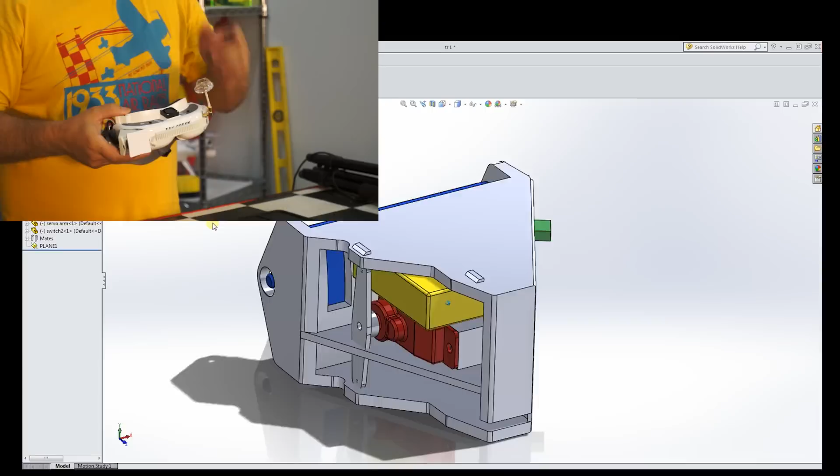And by ultimate, what I mean is head tracking patch antenna goodness. Stay tuned as we walk through this DIY project you can do at home.

First thing you're going to be saying is, why do I need a head tracking patch antenna for your goggles? If you're familiar with the Laforge system, it's a diversity system for the Fat Shark goggles. You want diversity so you can run a patch antenna, circular polarized antenna, two patch antennas, different types of antennas for different types of flying.

But the problem is patch antennas are very directional, meaning they've got to stay somewhat level, pitched up slightly, in the general direction of where your aircraft is flying. If you're an FPV pilot like myself, when you fly, your head is moving around.

Before the Laforge, our diversity systems were these big heavy tripods that you had to lug around. But they were stationary, so you're able to angle your patch antennas in the general area you're flying. So they were great for a stable video signal, but terrible for portability.

So the Laforge system was a great product when it came out, but the problem is, like I said, when your head is pointing at the ground, you're not really utilizing that secondary patch antenna to its full advantage. So I thought, what can we do to improve this?

And the Millennium Falcon upgrade to the Star Trek Laforge was born. And obviously you can see why I'm calling it the Millennium Falcon. But it's just a module, and we're utilizing the head tracking bay. It just snaps in, and allows that patch antenna, at any angle, to stay level as you move your head around in FPV flight, to take full advantage of your Laforge diversity system. So stay tuned, we're going to walk through the build right now.

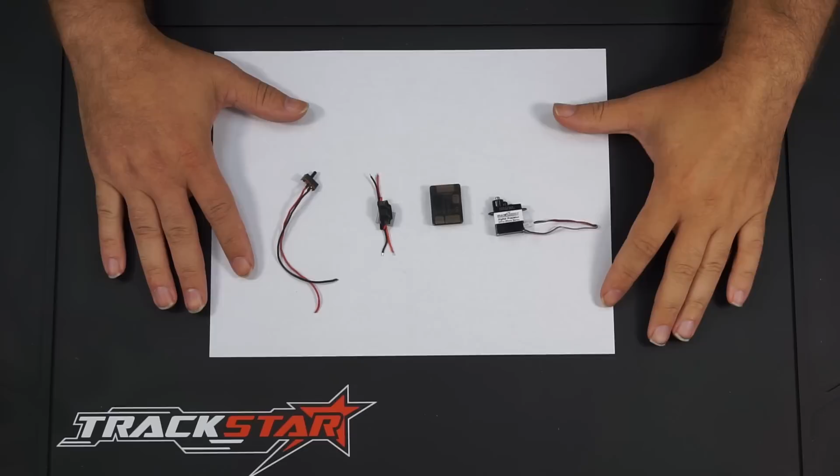Alright guys, let's go over what we're going to need to get this build going. First thing is just a small micro switch, 2 position, smaller the better. Needs to be able to handle at least 1 amp. Most of them in this class will easily handle that. I actually scavenged this from a toy, pulled it out, cut the wires, but you can pick these up at Radio Shack or any electronic hardware store, or just scavenge one yourself.

You're going to need a 5-volt BEC, smaller the better, at least a half amp, because we are going to be running a servo off of that and our FC as well. This particular one is shrink wrapped and already has wires soldered right up to it, so it's fairly nice, very small, easy to use BEC. It's actually the smallest one that I know of. You could also do something like a Pololu, but you just shrink wrap it, solder the wires onto it. I don't know how to pronounce that name, but those BECs work extremely well as well.

You're going to need a micro FC, 32-bit, compatible with CleanFlight. Smaller the better. This particular one is the 10 DOF. It comes with a nice mounting case, so I actually did my CAD work around this particular FC. You can pick this one up from Hobby King, and it works extremely well. It's about the smallest one that I know of as well, with the BEC.

Also, you're going to want a high quality 5-gram servo. Any 5-gram servo will work on this. This particular one is made by Blue Arrow. It's a digital, full metal gear, high torque, 5-gram servo. I like this because the higher quality digital servos have less ratcheting as they're moving. Since this is going to be on your head, you don't want audible sounds of that servo moving or that ratcheting coming through. This servo is extremely quiet, extremely smooth, extremely high resolution, and like I mentioned, ball bearing and full metal gear. So I recommend one of these servos, or just any other quality 5-gram servo you can pick up.

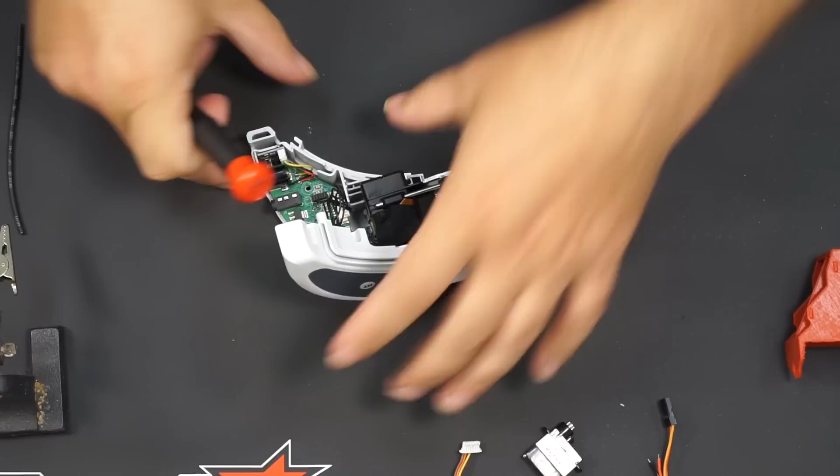So let's go ahead and get started. Okay, with the screws out, just carefully lift off the top of your goggles and flex that to the side. Just be careful, there's a couple ribbon cables. We don't need to fully disassemble these goggles. All we're really going to do is take out this board just to make it a little easier to solder. There's just one screw right over here that holds that in.

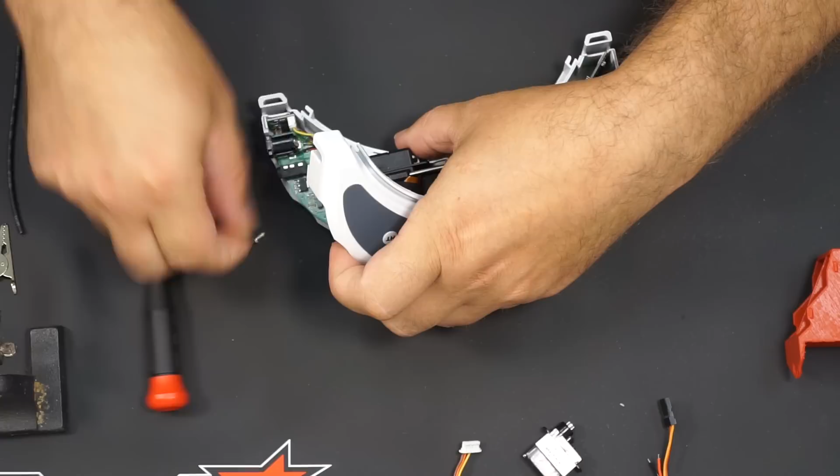And we're able to lift that up. We've got a connector right over here. Just pop that off. And one right up here. Go ahead and set the rest of the goggles to the side.

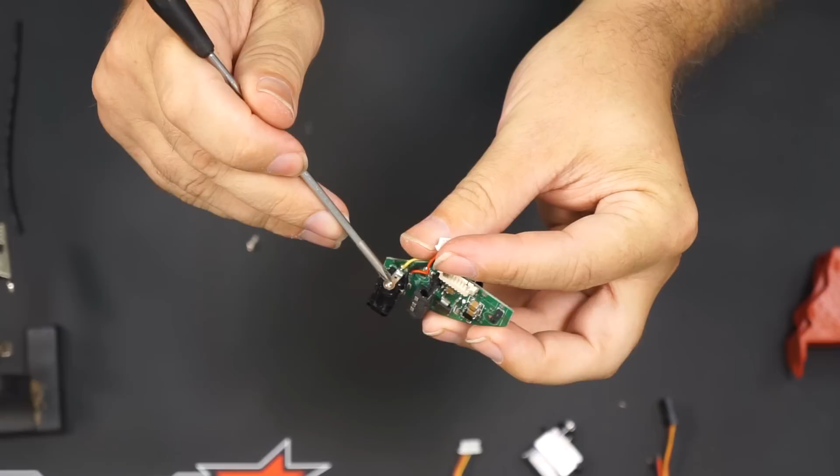Let's take a look at this. Right here is our 5.5 barrel 12 volt in. The center pin right here is our positive, and that is our negative. I'm going to go ahead and just take the servo extension, clip it off, and get it soldered right on there.

Okay, now that we have our goggles back together, we just need to check functionality as well as our voltage from our tap port that we just put on in there. You can see lots of room. We can just tuck that away inside the goggles. It's not going to interfere with anything, even if you want to put the original Trinity head tracker back on inside.

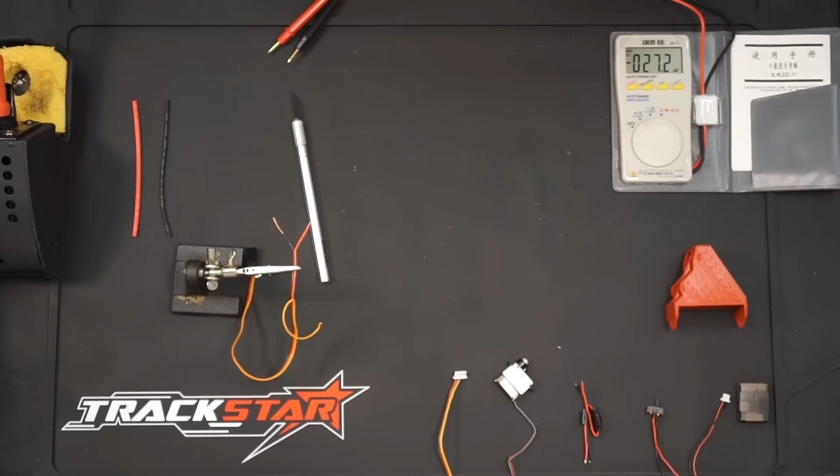So first thing I'm going to do is just go ahead and plug in my battery. And yep, I still have video. AV2 is showing on the OSD, so everything is functioning as far as that's concerned. Let's go ahead and check voltage out. I'm just going to go ahead and plug this in and check for our 8 volts coming from this.

Here we go, 8.28, so no problems there. So we are ready to move on forward to the rest of the electronics which are going to be on this. Okay, so now we need to make sense of the rest of this wiring.

Essentially, we've got power coming in from the mod we just did to the goggles via our servo extension that we clipped off. So this is the female end of that. So we'll go ahead and use that as power into our BEC. From the BEC, I'm going to put in another small connector so that I can isolate and remove the BEC if I ever needed to, as well as this is going to be tucked into the goggles itself, and I wanted to be able to have a separation point without the BEC.

So we've got this connector, which is the male side of that, which is going to our switch, and then is going to our port that goes into our flight controller to turn on the power. So we just need to solder up this to this, this to this, this to the switch, and the ground bypass right over here, so the hot will be switching right over here. So let's get soldering.

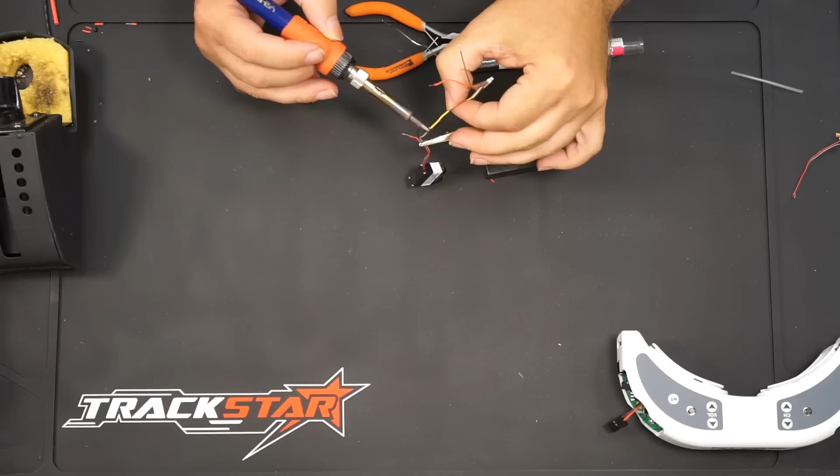Okay, so in theory we've got power coming in from the goggles through our 5 volt BEC to this connector, which allows us to isolate and remove the BEC anytime we need. This will tuck away inside the goggles themselves, and so this will be plugging into this box right over here.

Inside this box we're going to have our switch, which is going to be mounted right inside there with it coming out right over there. This is going to tag on over and plug into our FC to provide the power, and this plugs into our BEC. So we'll just go ahead and test our wiring, plug that into that, we'll grab the FC.

Now I'm providing the 5 volts via the UART serial port on the FC. We'll grab our goggles, plug this in, and plug this in, see if it works. So our FC boots up. And if I turn the switch, it turns it off.

So we are set to move forward with soldering up the servo. What I want to do on the servo, because it has a little bit of a different connector on there, pretty small leads, obviously it's just a 5-gram servo, is I've already repinned the wiring that comes with the FC, meaning that I'm just taking negative, positive. I've removed the rest of the PWM out for the motors, and I've actually only tied into port 2, which is going to be our pitch for our FC. So that'll be providing our PWM out to our servo as this actuates itself.

I'm just going to use a little hot glue gun to hold that in. Our servo just has the 2 screws that lock that in right there, and then the FC goes on top of it itself. I'll swap over to a CAD drawing real quick so you can take a look at it a little bit better, how that goes together. Okay, so this is a quick overview of where the components go inside the housing itself.

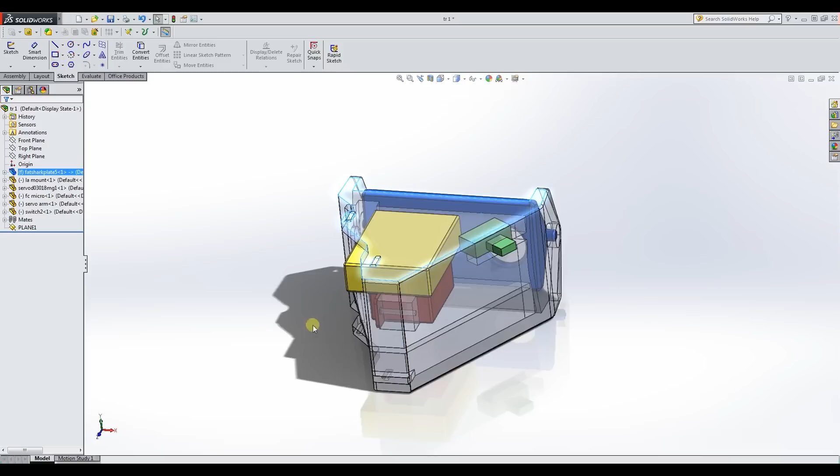Let me change transparency on this so you can see how the switch, FC, and servo mount inside. The servo has clearance right here, and underneath the servo and FC there's a pocketed area where you can tuck all the wiring. There's a slot so the power wires can come right out through here. The servo linkage that goes to this plate goes right through there, allowing your servo arm and the plate to actuate back and forth. Other than that, that's how it installs inside the housing.

Okay, here we go. I've got the completed unit, with the servo, all the linkage, the bearings, the front rotation plate, FC, and switches all mounted in there. We've got it all soldered up, so we just have the single power. This is the complete unit all by itself, pretty small, about the size of a standardized servo actually. And then of course we've got our power lead coming in, so we're just going to plug that in.

Tuck our wires back in here. Line it up. There we go. Give it a snap and the unit is installed.

I'm going to call this the Millennium Falcon upgrade to the Laforge. A little crossbreed between Star Trek and Star Wars. There we go.

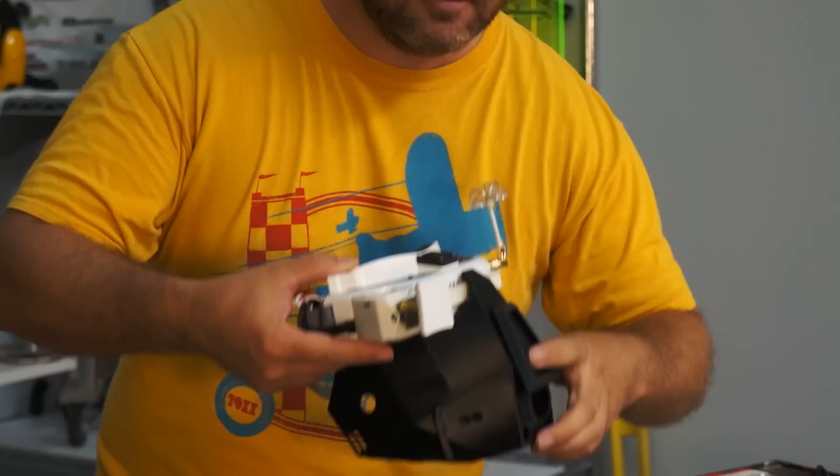Or we could ditch this to the side and go with something a little more popular, which is the mini whoops out there. I've got the ultimate whoop right here. This is 500 milliamp, 8.5 millimeter motors, Cleanflight, so I've got air mode, the whole 9 yards. Race it indoor, outdoor, and you can build this for a lot less than you can build one of these.